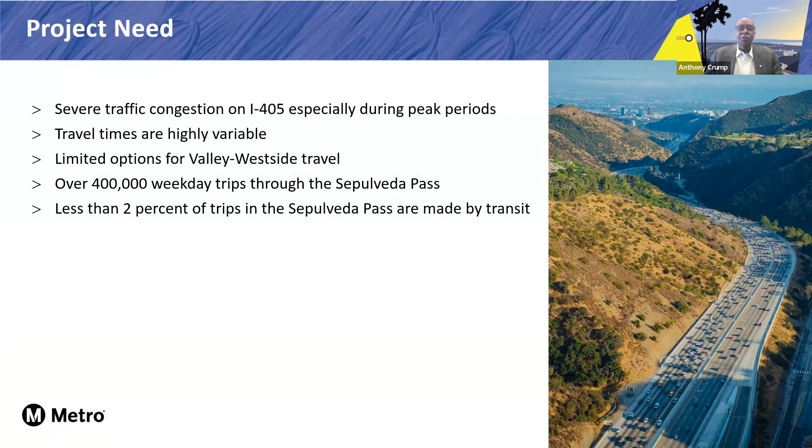So this particular project looks to create a new, fast, reliable, and safe transit option that connects the Valley and the West Side. It'll also link, almost as importantly, many of the existing or under construction transit lines. This includes connections to the Metro D line, which Oscar just talked a little bit about, the Metro E line, as well as the Metro G line, and the under-construction East San Fernando Valley Light Rail Transit Project. This project would actually save travel time for residents by offering a trip from the Van Nuys Metrolink station to the E line that would be about 20 minutes by transit.

And let me just take a second to let that sink in. Imagine going from the Van Nuys Metrolink station to the E line all the way across the pass in less than 20 minutes or so. So the point is that this will provide mobility options that would reduce the vehicle miles traveled. It would provide mobility options that do not currently exist for many of the residents and businesses along that particular corridor. Next slide, please.

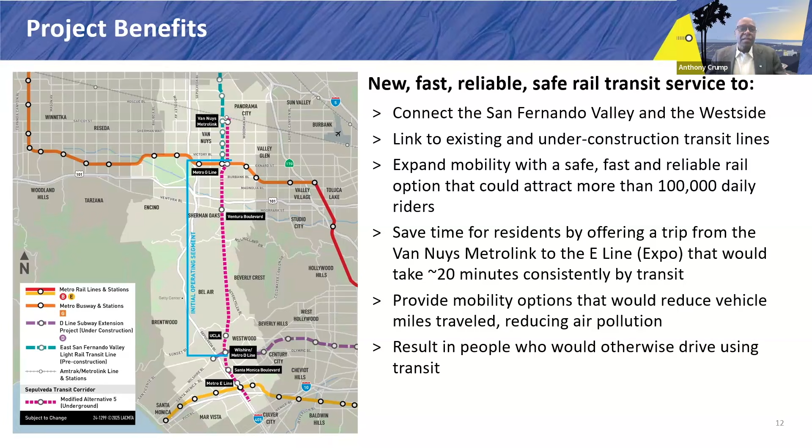So as I mentioned previously, we're looking at creating a fast and reliable transit option that goes between the valley and the west side. Trips from the valley to the west side right now can take anywhere from about 40 to 80 minutes, and that's particularly on a good day. Imagine if there's a SIG alert, a traffic accident, or a special event in Westwood or Sherman Oaks — that travel time can easily be doubled.

But this particular transit project would provide safe, reliable access between Van Nuys and Westwood in about 10 minutes. In addition, with the D-line extension currently under construction, you could connect easily at the Westwood station or the UCLA station and go from Van Nuys to downtown Los Angeles in about 35 to 40 minutes, which right now is pretty much unheard of.

Not only does this project open up the Valley and the West Side transit connection, but it also opens up Metro's rail line to the entire county. So it's about creating opportunity and options for mobility across the county, not just in this particular corridor.

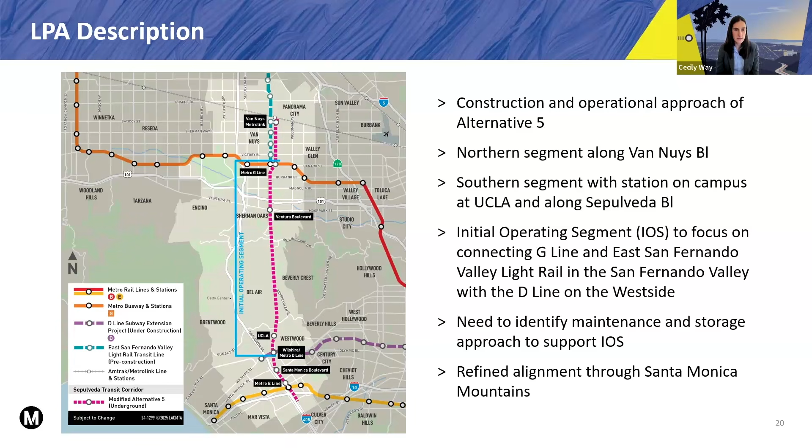The LPA includes an initial operating segment, or IOS, between the G line and the East San Fernando Valley Light Rail in the valley, and the D line in Westwood, providing the first piece of what would be operating for the project. Because that locally preferred alternative is in the middle of the project and the previously considered maintenance and storage facilities were outside of it, this IOS would require a new maintenance and storage facility strategy.

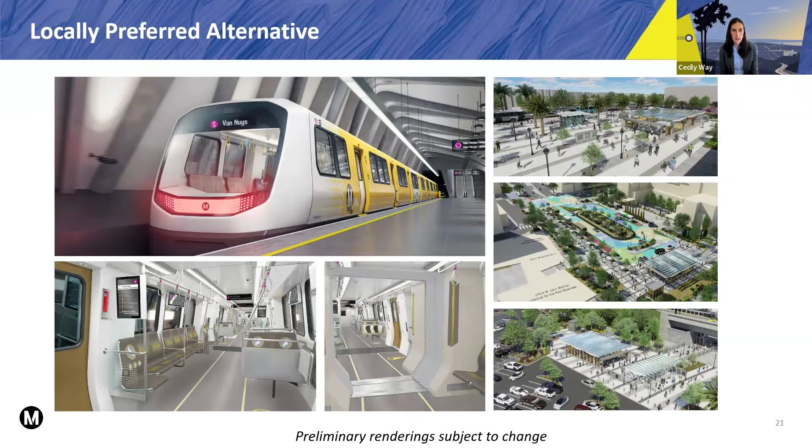The locally preferred alternative aligns with the goals identified in CEQA scoping and in the draft EIR, as well as many of the comments received to date, including the over 8,000 on the draft EIR.

Alternative 5, which the LPA is a modification of, was the highest ridership and among the fastest alternatives. The travel time of alternative 5 is anticipated to be reduced and improved with the LPA, as the route is shorter and more direct. The LPA includes direct connections to the Metro D, E, G, and Eastern Valley lines, and the Metrolink Ventura County lines, as part of that first piece.

Alternative 5 had the greatest VMT reduction, and this phasing approach allows for the project's mobility benefits to be delivered earlier as funding is available. The LPA has the shortest, most direct alignment of any alternatives considered, and has the fewest number of stations, which we anticipate could help reduce costs.

Now that the Metro Board has selected a locally preferred alternative, we're moving forward on advancing the project in many different ways. We're going to provide you an update today on what we're up to as we continue to bring the project forward towards construction and eventually operations.

I'm going to walk through each of these efforts, organized broadly into five categories: design refinements and engineering, environmental, geotechnical and site investigations, delivery planning, and community engagement. These are all oriented around key milestones that we're advancing to get to environmental approvals.

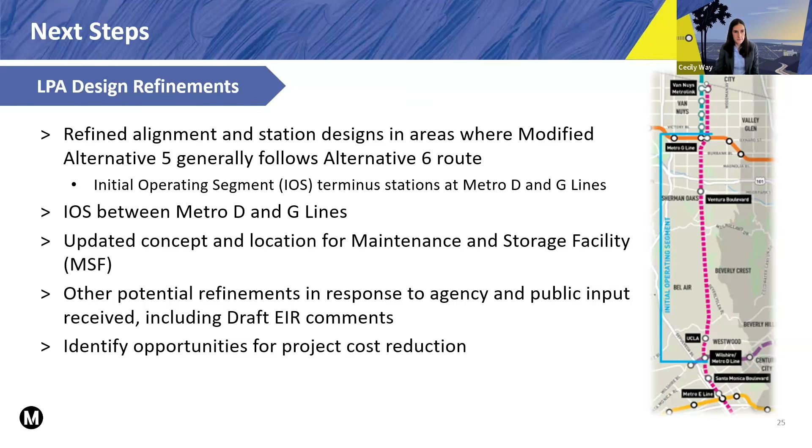The next piece of work we continue to advance are environmental approvals. First, I'll focus on federal approvals under the National Environmental Policy Act.

Metro is currently circulating a Planning and Environmental Linkages, or PEL, study for the project. This federal process allows NEPA, the National Environmental Policy Act review, to be streamlined, taking all the extensive work and input received during the draft EIR process to inform the NEPA process. This study allows the formal NEPA process to focus on the LPA. While the PEL study does include all of the CEQA alternatives, that analysis is based on the draft EIR, with an additional look at specific federal requirements and environmental considerations.

The analysis of the LPA in the PEL is based on the draft EIR analysis of alternatives 5 and 6, but is preliminary given that design is currently being refined. This document is available for review right now, and the comment period for the PEL study will close May 9th.

As we prepare for starting the project's federal environmental approvals, we continue to advance the state environmental approvals under CEQA, the California Environmental Quality Act. Because the LPA was not an alternative studied in the draft EIR, Metro will prepare a recirculated draft EIR which focuses on the LPA. This document will have a similar level of engineering and environmental detail to the draft EIR circulated last summer, and will be circulated for public comment just like the draft EIR.

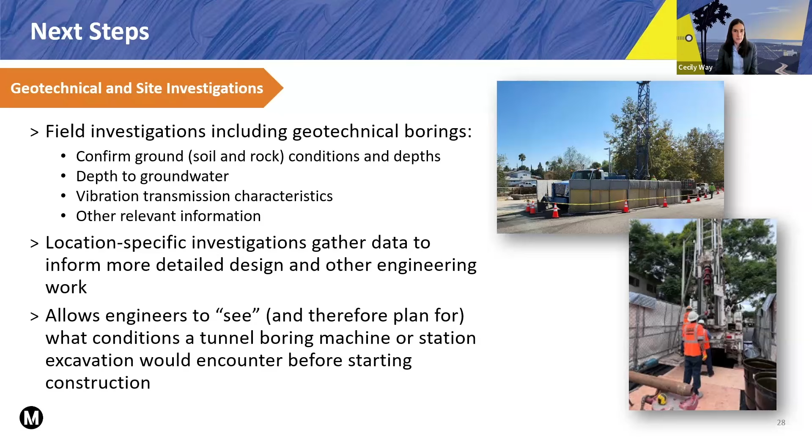As these investigations start to begin, which we anticipate kicking off this summer, the duration of each will vary by the type of data being gathered, the type of ground, and the depth. For example, a geotechnical investigation that's 40 feet deep will generally take a shorter amount of time than an investigation that's 200 feet deep.

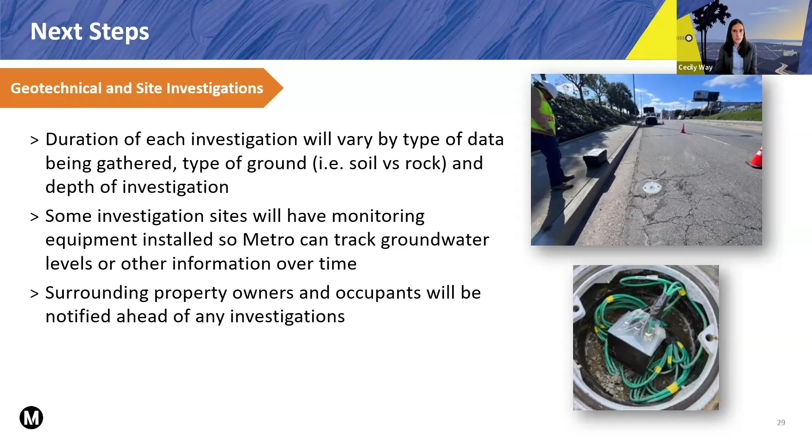While we're doing a lot of planning and designing for the project, Metro is also looking ahead at how this project will be delivered. Another thing that's innovative and different about this project compared to other Metro projects is that Metro is looking at delivering it as a P3, or public-private partnership.

To date, Metro has had two different potential private developer partners working to develop alternatives for delivering the project. With the selection of the LPA, there's one that Metro is continuing to work with, and that is Sepulveda Transit Corridor Partners. So what is a P3? A P3 is a contractual arrangement between a public agency and a private entity to deliver and operate an asset.

It leverages the private sector's skills in financing. It provides a way to share in risks and rewards of a project and incentivizes innovation and long-term performance. It's important to note it doesn't provide free money, but rather financing or a funding source that requires repayment in the future. Metro continues to retain ownership of the assets. We think this project could be uniquely suited to be delivered as a P3, given the different design, operational, funding, and financing considerations for this specific project.

In order to evaluate whether this makes sense as a P3, Metro will be undertaking a P3 evaluation focused specifically on the LPA.